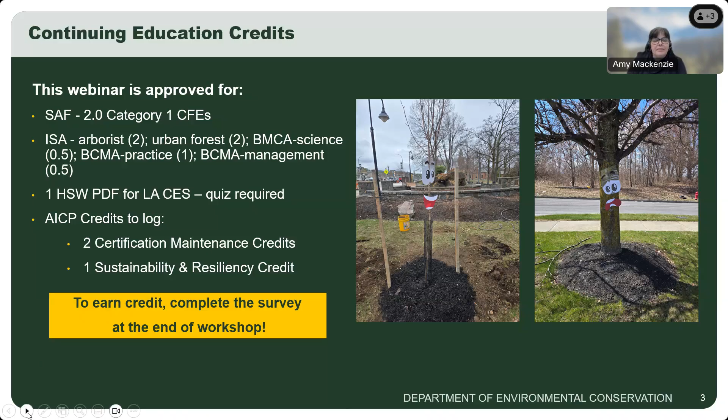You will hear from 3 great speakers today whose presentations will improve your knowledge around what tree roots need from soil and methods you can use to provide those needs. Please enter your questions in the chat as we go along, and we'll save about 10 minutes after each presentation for the presenter to respond.

Our first presenter is Angelo Schembari, who is often asked, 'What's wrong with my tree?' Unfortunately, that question is often asked years after rooting issues could have been prevented. Angelo is an International Society of Arboriculture certified arborist and owns CGL Arborist Services - CGL being his kids' initials - in Cornwall, New York, in the Mid-Hudson Valley. Angelo is also president of the New York State Arborists Association, an association of professional arborists and educators that promotes public interest, fosters research and education in the care and benefits of trees, shrubs, and their environment. So thank you, Angelo, I'll have you put your show up and take it away.

Thank you, Amy. I just want to chime in that if things had gone according to plan, I would no longer be the president of the New York chapter ISA, but our conference and election got snowed out with the major storm we had. So I'm president for another 4 days, theoretically. But thank you for the introduction. Amy and I have known each other for over 15 years now. And although we worked for the same company and worked together and spoke to each other via cell phone and two-way radios numerous times, we met for the first time in a gas station accidentally.

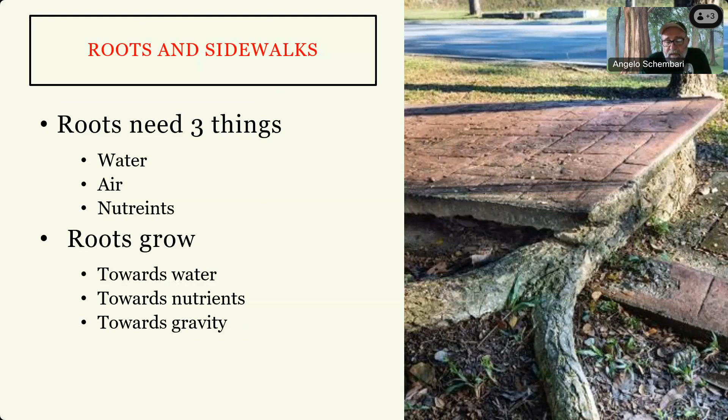Just basic biology: roots need 3 things. They need water, air, and nutrients. Roots grow towards water, they grow towards nutrients, and they grow towards gravity. Those are the 3 tropisms that direct root growth.

The problem is the need to grow towards gravity can be overcome by limitations of water, air, and nutrients. When we have sidewalks, the area immediately under the sidewalk has air and water. It's generally limited in nutrients, but that's enough to overcome the tree's desire to force roots to grow lower.

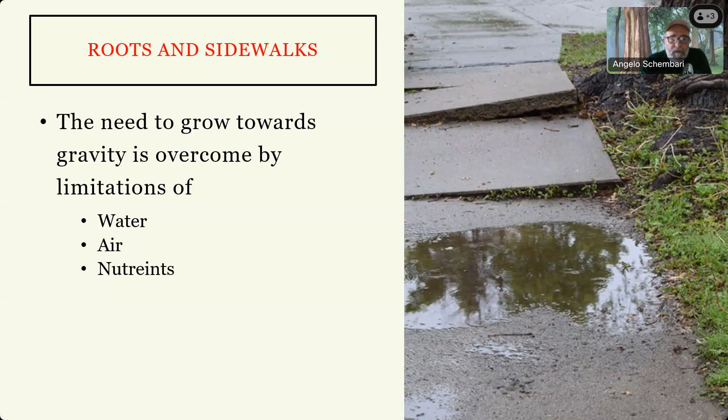So we have soil under a paved surface, whether it's asphalt, concrete, pavers, or pervious pavement. The top surface is typically highly compacted to support what's above it. For drainage reasons, there's a thin layer of gravel, sand, or other hard-to-compact material that maintains drainage and air spaces, and roots tend to grow there because of the availability of air and water. Since that's immediately under the paved surface, the roots tend to disrupt or lift the surface above rather than compact the soil beneath.

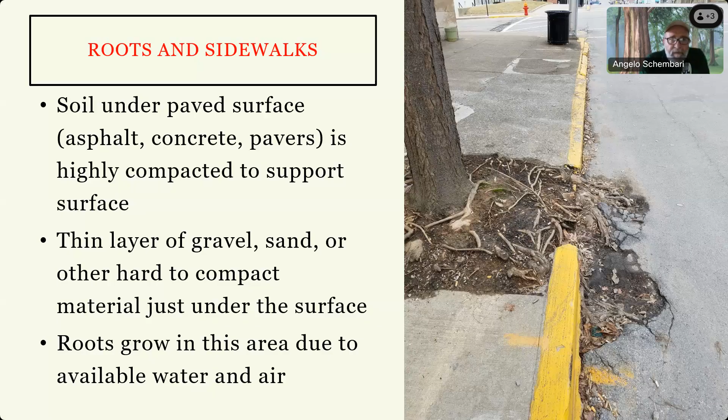People say to me all the time, my roots are growing up through the soil, and I say to them, yes, they are. It's easier for a root to displace a small amount of soil - 1, 2, or 3 inches - above the root than to compact all of the already compacted soil below it. That causes this asymmetrical root growth, and the roots grow upwards through the soil.

In the areas where I work, mostly the Hudson Valley and up into the Catskills and Southern Capital Region, the majority of soils we encounter are heavy clay with a lot of embedded rocks. It's typically compacted, whether in urban or suburban space. Soil compaction before any paved surfaces go in is already a challenge for many trees we commonly plant, and the compaction from installing a sidewalk or driveway just makes the problem even worse.

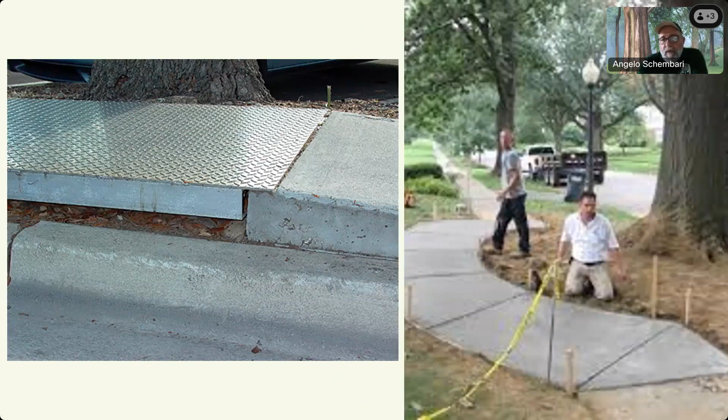In some places where ramping doesn't work, if you look on the right, we reroute a sidewalk around a tree. Lots of times people say, well, that's easy - but depending on who owns the sidewalks in your municipality, that may involve a whole legal process of securing new easements for the sidewalk to extend further into the property than originally laid out. That's an added cost down the road.

Or you could get really creative, like they did on the left here - there's actually a metal bridge over the sidewalk where the roots were.

The better plan, the better process, is to start out with something that has a high probability of success at the designing stage. A lot of urban street tree planning is still done by architects and engineers. Engineers worry about infrastructure, drainage, and trip hazards. Architects worry about making it look nice and presentable, something a community can be proud of. Arborists and urban foresters are often consulted at the last minute, or only when there's a problem.

Somebody told me a long time ago - not to knock on landscape architects - but landscape architects' goal is to make it pretty, and arborists' job is to make it survive.

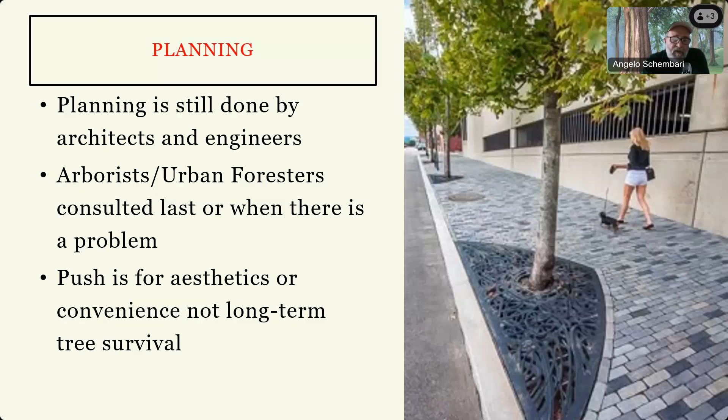The push for aesthetics or convenience does not typically work well for long-term tree survival. So we create a situation where we go out and put these metal grates in because everybody thinks that's going to work, and they've appeared on so many streets. There's a call out on landscape plans that's easy to do, and we put this little tree in this metal grate, in this tiny tree well, with impervious paved surfaces all around it. And 20 years down the road, we end up with the picture on the right.

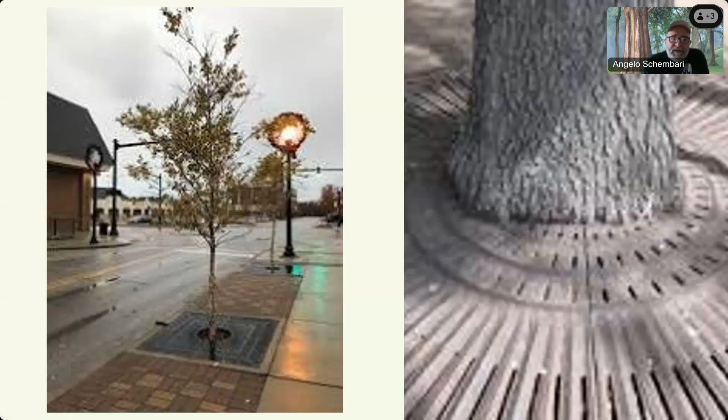If you're familiar with metal tree grates for tree wells, the one on the right is designed to have sections broken out as the tree gets larger. But with many other aspects of municipal tree care, there's just not the time or manpower to get out there and do what everybody knows needs to be done. So the grates aren't broken out, the holes aren't enlarged, and you end up with situations like the grates girdling the trees. So the planning needs to be done from the ground up.

The way we do that is we plan for adequate and appropriate soil in large enough quantity. Structural soils, from the aspect of tree root growth, are not soil—they're stone for the most part. Structural soils serve a very important role when you have, say, a curb lawn with a tree in it, and adjacent to that a sidewalk, and adjacent to the sidewalk a regular residential lawn. Structural soils can be very useful in bridging the gap between the tree and the proper rooting area in the residential lawn.

The problem is structural soils are typically installed somewhere between 6 and 10 inches in depth. To be really effective, they need to be installed to about a 24-inch depth, which very few people are doing.

Not to totally trash structural soils, but if you go back in time, structural soils were all the rage in New York State and many other areas in the Northeast. The structural soil we use is typically CU structural soil, which is Cornell University structural soil. The composition and the rights to sell it are a patented process.

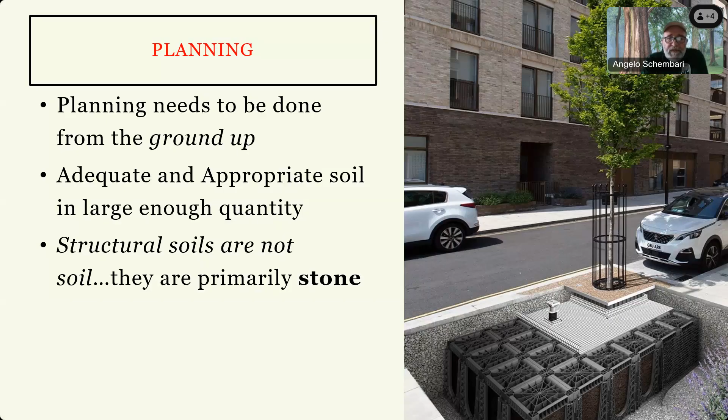So our current tree planting models produce large trees by luck, not by design. The tree in that picture—you can see the sidewalk is lifted to the right of the car there.

But our current models have a lower front load cost. They're cheap to install—you dig a small hole, make a small tree well, put in a small tree, and it's pretty inexpensive for a municipality to do. But they have a much higher backload cost. As the trees get larger, you're looking at milling sidewalks, replacing sidewalks, tree removal and replacement, and potential

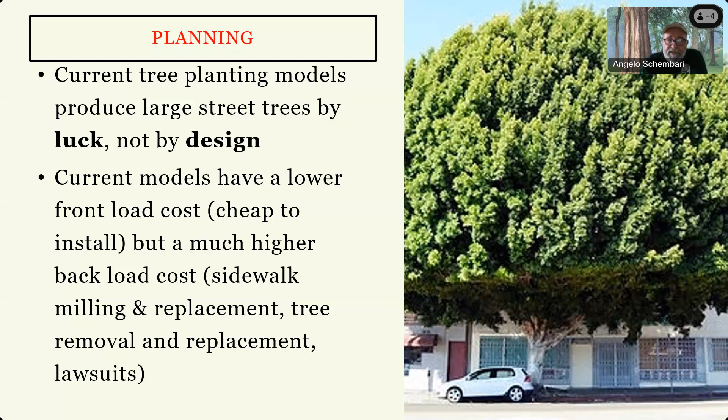lawsuits down the road. The models that use Silva Cells or other subsurface soil rooting mechanisms cost a whole lot more to install up front, but the long-term cost and the ability to consistently provide larger urban canopies, without the continual cycle of plant, maintain, remove, replace, is in the long term a much better value for most communities. The problem is coming up with that upfront cost can be very, very challenging for most communities.

So when you're doing planting, lots of times people don't know where to start. How do I plant? What's the right way to plant? Well, there are guides that exist to help decision makers when it comes to tree planting. The first guide that I typically turn to is a series of standards called the ANSI A300 standards. It covers every aspect of tree care.

They're developed by TCIA, the Tree Care Industry Association, ISA, and input from many other stakeholders in the tree care industry. They're updated very frequently. It was all in one book, then split into each different area having its own book, and now they've put it back into one book. So if you're involved with tree planting and maintenance, having a copy of the A300 on your desk would be a good place to start.

The A300 does not read easily. There are constant should and shall lines in it, and should is a recommendation while shall is kind of a mandate. So to make that a little easier for people to deal with, the best management practices were developed.

Thanks so much, Amy. I'm Brent Knepper, the urban forester for the city of Kingston. My talk today is called Preserving Trees in Sidewalk Design. This is going to be a focus on a case study that we did here in Kingston. Some key points, kind of general purpose.

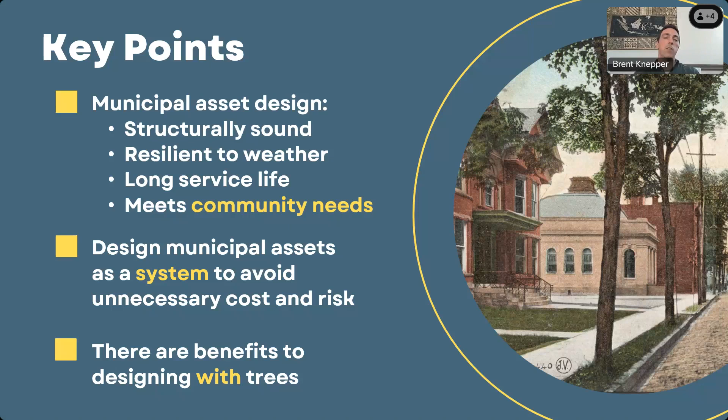It's what we're all talking about today with trees and root space. I'm going to look at it from a municipal asset design level. Any municipal assets, ideally, we want them to be structurally sound, resilient to weather, have a long service life, and meet community needs. Designing those municipal assets as a system is our best way to avoid unnecessary cost and risk. And there are benefits to designing these with trees in mind.

Here in Kingston, we're a small city. We have just over 3,000 street trees and 80 to 90 miles of sidewalk, a lot of which is bluestone. For a community that's only about 8.5 square miles, that works out to about one tree every 150 feet or so, which is also usually our general parcel size too. So a decent density for a small urban environment.

One example of that is an update that we did this past summer on Wall Street in our Uptown neighborhood. This includes a before picture. You can see this is blacktop that was poured over multiple times. There are 4 shade trees in this 100-foot section of blacktop sidewalk that's going to be updated. At the time, there's a lot of pavement cracking and uplift as a result of the root conflicts from compacted soil.

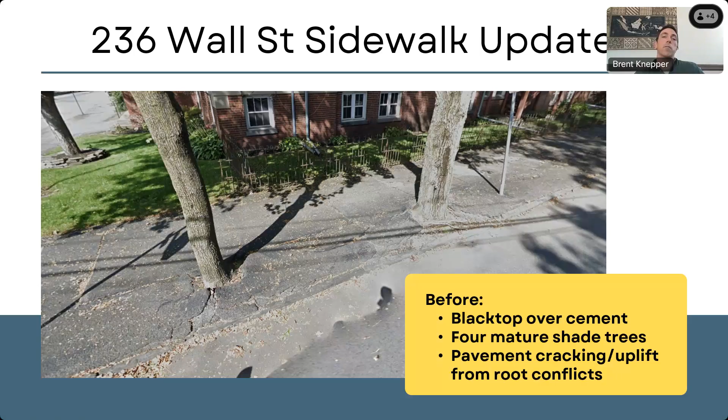The original sidewalk plan, pretty standard for installing new sidewalks: excavating materials, compacting subgrade, base course gravels, and then the hardscape going in on top, in this case bluestone. Although this wasn't called out in any formal plan, it would have involved cutting through about 40% of the existing tree roots as they were conflicting with a new sidewalk being laid flat with no slope changes.

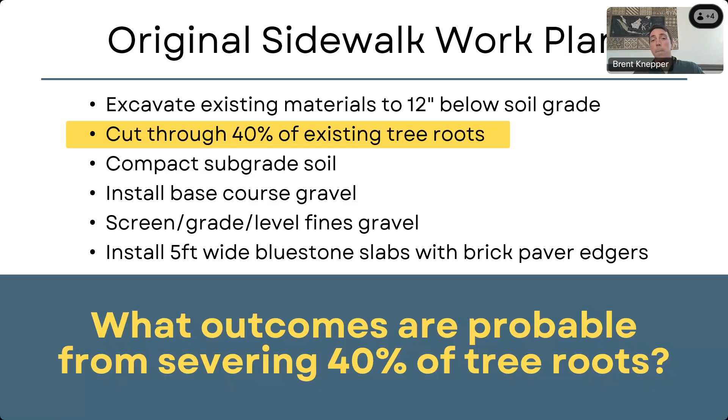So a question worth asking is: what outcomes are probable from severing 40% of tree roots? Best case scenario, in the short term, you'll have dead branches. Where roots are cut, we can usually look up into the canopy as a simplification and find dead branches resulting from those cut roots. The first 5 to 10 years is when you could expect something like that.

In the medium term, 10 to 20 years, the trees might decline. Pests, disease, decay could develop in those trees. The trees will also try to survive, of course—the roots will just regrow under the sidewalk, and as a result, the root and sidewalk conflict cycle restarts. For the most part, these are nuisance and maintenance items to consider. Long term, we'll again have pavement uplift and cracking leading to replacement, which generally leads to a lower service life.

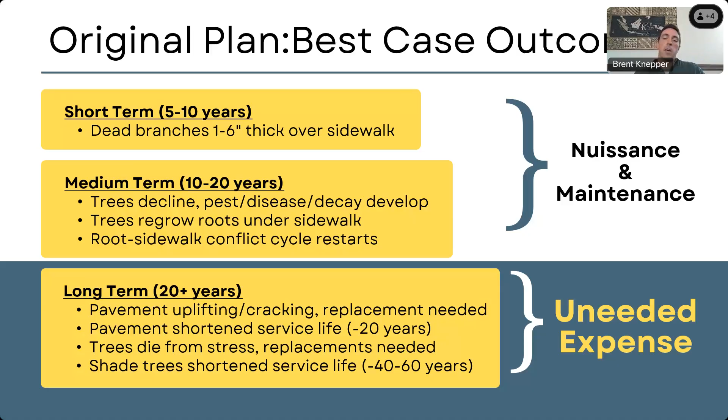Of course, there are worst case outcomes when you do not design to incorporate existing tree roots. This is a little dramatic on my end, but I use it to make the point that when there is no longer the anchor support of tree roots on the sidewalk side—be it from cutting the roots for a sidewalk project, or just further compacting over those roots, which could lead to root decay and decline—the tree is no longer structurally sound. It's a simple formula: the force of wind during storms, multiplying the load at the tree's weight, but without any of the support of the roots on the sidewalk side, has a very probable outcome of whole tree failure.

Personally, I would like to avoid this outcome, and I think most urban and community foresters are quite often thinking about this with their plans.

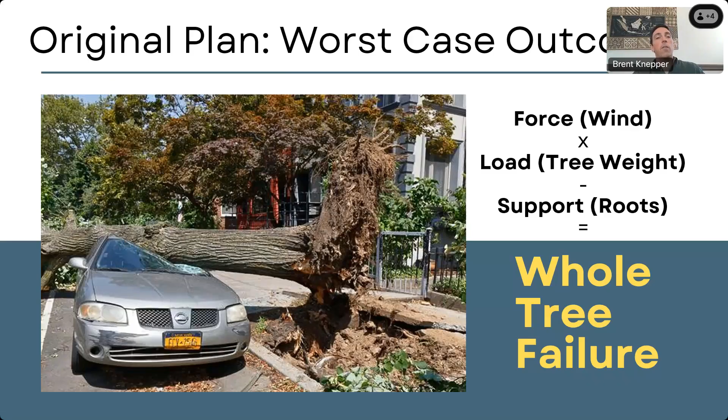So for that reason, we came up with a new sidewalk work plan. The main changes focus on excavating the top 24 inches of existing materials by hand and air excavation. The original blacktop and stuff still had the capacity to be removed with an excavator without causing root damage. This is a retrofit application.

Today we're talking about pros and cons of structural soils. Structural soil, not being like a modular structure that has finite size requirements, means that it can really fill organic shaped voids.

Think about the soils that you might excavate around tree roots when trying to preserve them. Using hand labor or air excavation minimizes damage to the structurally most important roots in the trees. After installation of the structural soil, which was designed to still reach that 95% proctor of compaction that engineers and sidewalk designers think about so much, the top layers, the more aesthetic parts and the hardscape, can still be put on as normal.

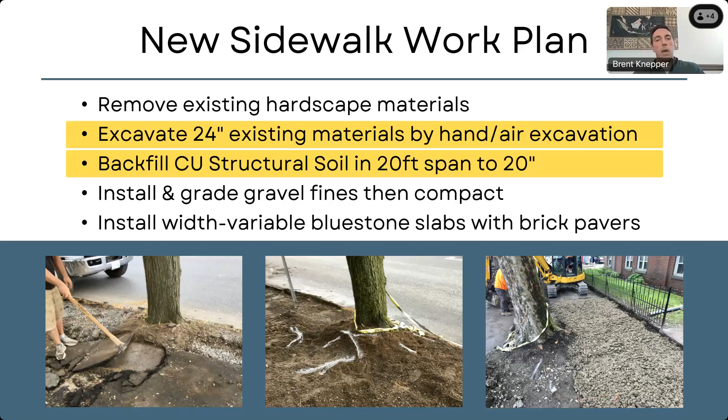Here are some progress photos. On the left, you can see an excavator installing the structural soil from a parked dump truck.

One recommendation with structural soil is that you want to keep it damp. The clay that's acting as the binder for the other materials and the large supporting stone, they really want you to keep that damp. Luckily, although the time of year we were doing this was pretty hot, we had high humidity levels and a lot of rain going on too.

Using the excavator, the tracks actually create lower PSI pressure on the soils compared to tires, and in some cases even less pressure than human feet. So it's a way of using machinery where we're not struggling with additional compaction, which is what we're trying to alleviate with this retrofit design.

On the right, we see further along in this progress, the new materials. This is a bluestone sidewalk with brick paver edging that's been installed. The workers are now bringing in topsoil, and then we'll have seed and straw put in place to keep a planting strip on the side of it.

Take a look at the one worker who is walking towards the far end of the frame, not holding the wheelbarrow. He's standing over a section of sidewalk that is now all brick pavers. This is ADA approved, and by having the brick pavers put over structural soil, there is an increase in air and water percolation to below, for those who were listening during Angelo's talk about what tree roots need.

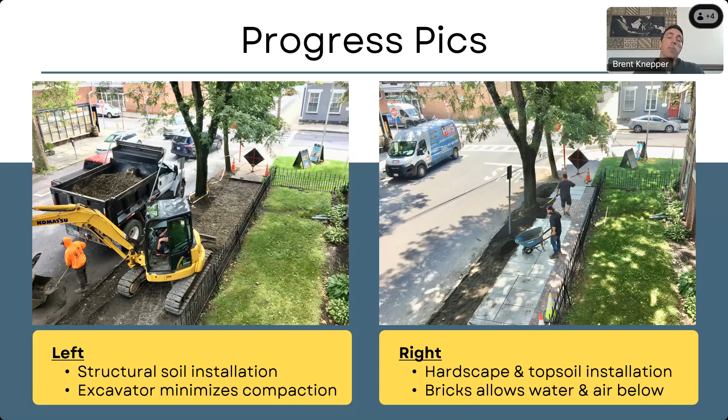Some more details of this completed work. On the left, you can see that there was a total reduction in the width of the sidewalk around these trees. This allows for that tree root flare that all us arborists love so much to continue to grow.

The sidewalk is doing an up and over approach around the tree roots. Some were at a high enough surface level. I regret that I didn't have a good photo of that air excavation where you only see the roots and all the soil has been removed above and below, but timing didn't really allow for it.

In this case, the slope that's going over these most surface level tree roots ended up at about 2 degrees, still within ADA standards for going up and over. Visually, for most people using the sidewalks, or those who might have concerns about sidewalks and ADA compatibility, the slope is very hard to notice. It may also just be something that we see in any community with any kind of rolling terrain, just a generalized slope.

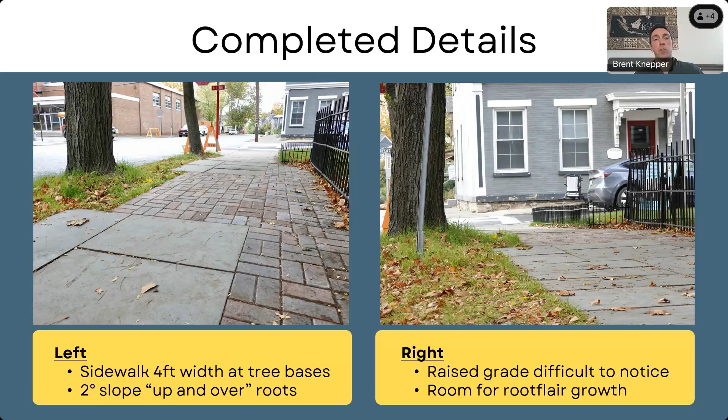To talk a little more about the ADA aspects, these are really great numbers to know and metrics to use when thinking about keeping trees in a sidewalk reconstruction process. The top one, I was just touching on that.

The ADA allows for a max slope of 5%, or 1 in 20, for doing that up and over kind of work. There are allowances for narrowing sidewalks. I think that's really important in our Northeast urban communities where we don't have a ton of space building edge to building edge, compared to how some newer developed communities might have.

So to that end, sidewalks under ADA Chapter 4 walking surfaces can, for a very short distance, go down to 32 inches wide and still be ADA compliant. They can't do this for more than a 24-inch distance. I think that's very important to note. So only for 2 feet can it go down that wide. We think about the size of most street trees.

I think that gives us some breathing room to work with, because as we get to the third point, after that 32-inch wide reduction, the ADA would want at a minimum to go back to 36 inches wide for a minimum of 48 inches distance. In general, ADA Chapter 4 says that when a sidewalk is less than 5 feet wide, for every 200 feet a passing area must be included. That passing area gets defined in a few different ways under ADA. If that's something you want to focus on, look at Chapter 4 walking surfaces, specifically part 403.3 and 403.5.

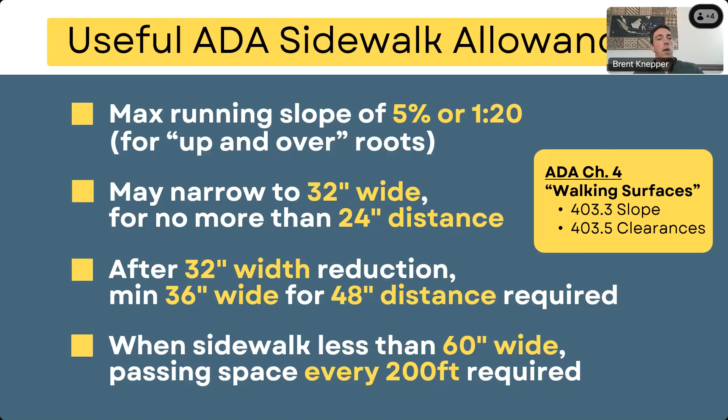Let's talk about the financial considerations for these projects. I think this is useful information for everyone listening. Bluestone restoration sidewalks in a historic area are not cheap to do, of course—unfortunately no sidewalks are cheap these days. The original project would have worked out to around $80,000. For a relatively small portion of deviations from the original plan to include the structural soil, the process does reduce the amount of total ROB base aggregate gravel that would have been used otherwise. So there's a little makeup with that, but structural soil will be more expensive than plain gravel, specifically the CU trademarked structural soil blends.

There's an increased time aspect with doing this project, as you can expect with hand excavation around the tree roots. I gave the contractor a lot of information on air excavation and how to do that, but it was a little over their threshold for what they were willing to consider at that time. So they had the manpower and focused on hand excavation instead, and I had to be on site to make sure everything was going well. It worked out well, and I was happy that by engaging with the contractor in a kind, understanding, problem-solving way, they wanted to work with me too. That led to about a $10,000 increase in price for the project.

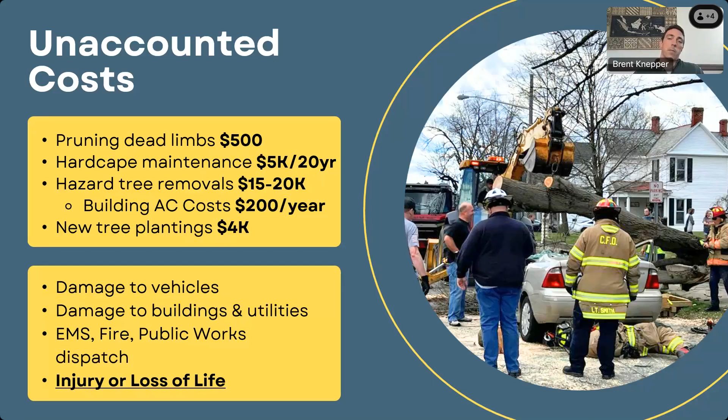Some additional considerations outside of just financial costs, because I think a lot of us are thinking about street trees beyond just financial costs. The average life of a forest tree, from the source I provided, is about 160 years for most of our canopy species in the northeastern forest, whereas the average life of a street tree is 23 years. That's not evenly distributed, so I give a note to what that might look like, because often there are different numbers thrown around for how frequently street trees die.

A lot of them do die in the first 7 years—30% is a reasonable number. In the first 15 years, another third, and by 25 years, another third. All of this is generally because of additional stressors urban trees face: limited access to air, water, and nutrients, pollution, damage, and heat stress. These are all factors.

When we think about trees like the ones in the case study I'm sharing today that have made it past that 25-year mark, they're already just the only 10% that have survived after all these attempts at planting trees. It's important to think about the fact that for a street tree to reach carbon neutrality, factoring in the cost of growing the tree, the nursery, the materials for transporting it, the fuels, and so on, a street tree doesn't really reach carbon neutrality until somewhere between 26 to 33 years. So we may be dooming the few trees which do survive if we're not designing for things like root space in our municipal structure designs.

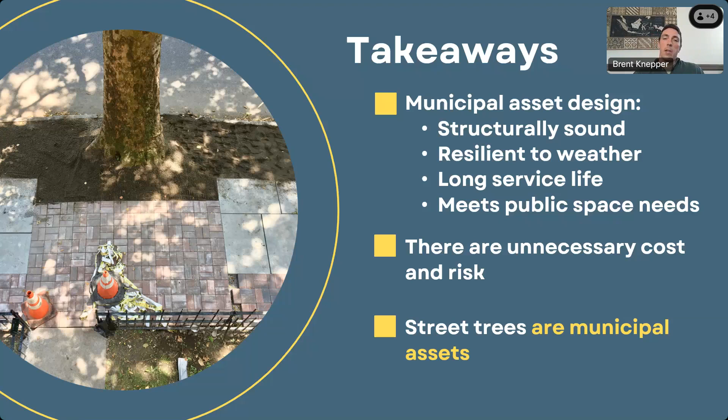And with that, I want to say thank you to everyone. Happy planting and happy designing. Looks like I ended up going a little bit faster than I thought, but hopefully there are some questions people have.

Amy, we lost your audio a bit. I figured out the problem. Can you hear me now? Amy, I can hear you now. Okay, well, thank you for that. It's such a forward-thinking and practical solution. I hope everybody takes a lesson from it.

We have about 10 minutes for questions, and it looks like we have one from Ben Mertz. Do you expect additional maintenance costs because of the pavers over concrete?

I'll give you two answers to that, Ben. Short answer, yes, I do expect additional costs in the situation that the 24 inches of structural soil provided is not enough. I think 24 inches, as Angela mentioned, is kind of the minimum, but the comparative cost of not doing it, I think, is higher. So that's kind of the one double-edged sword to this. I don't think anything really has a zero maintenance cost to it, but yes, it's important to think about in these retrofit applications what maintenance costs might come down the road. Those brick pavers may have a shorter service life compared to the bluestone, but they're spec'd at a width that would then allow for a bluestone slab to go over the top as well.

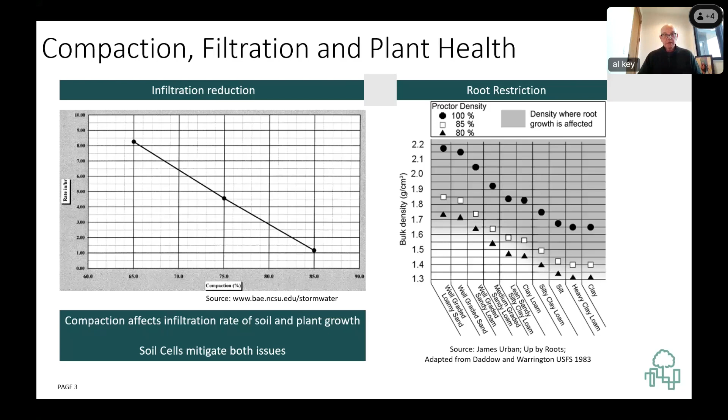Likewise, as compaction increases, infiltration decreases. So essentially, we are building, or have traditionally built, effective drainage channels for dead trees.

Water is a resource. Keeping it on site is something that we would really like to do. It is often mandated by the DEC in the state. And I would say, where there's a lot of talk about budgets, if we can raid the stormwater budgets, we can help pay for these more expensive systems like mine, like the Silva Cells, these suspended pavement systems.

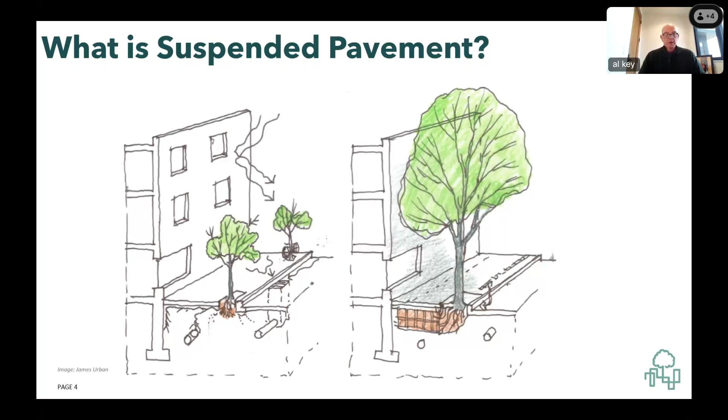So some sort of box that you put underneath the sidewalk to support the sidewalk is what I'm proposing for people to do. I don't want to spend a lot of time selling you guys my products. I'm concerned about your impartiality. For Brent and for Angelo, there are a number of manufacturers, I'll be going into those, but I assure you that we have fully thought this out.

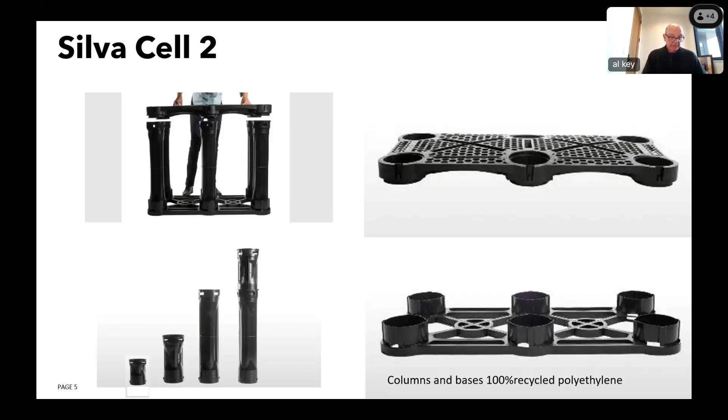And Jim Urban, who Angelo spoke about briefly, was instrumental in the development of this product class. To just show you what we've done in New York, I'd like to show a few projects of what we've done, and then we'll get into the course proper.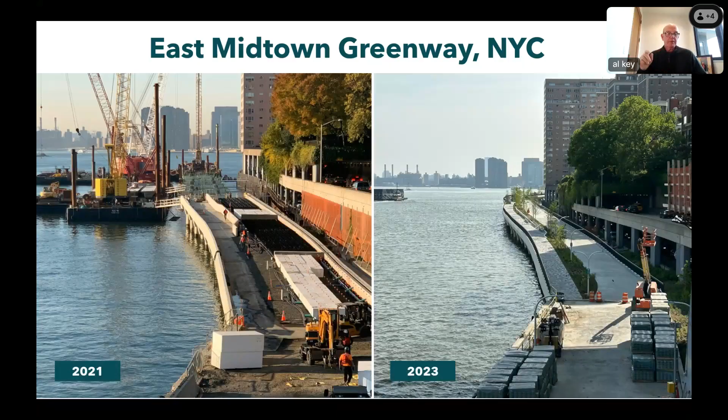East Midtown Greenway is our most recent large project in New York City. This is a bridge from 54th Street up to 59th Street, which is meant to be part of the bikeway all around the island of Manhattan. These are the silva cells being installed, and then I was there last summer, took a picture of virtually the same place.

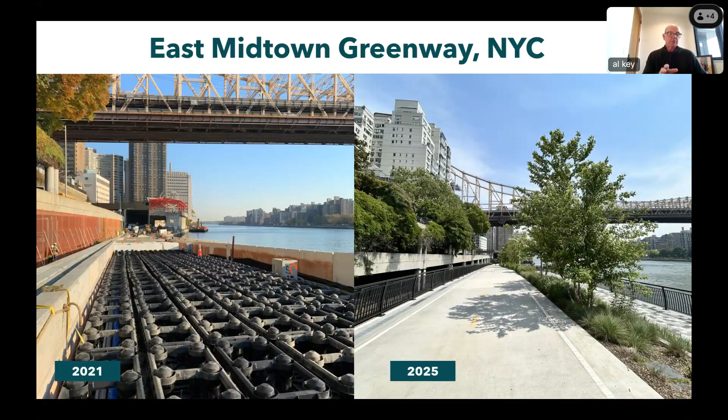Likewise, New York City DOT and their Plaza program, we have about 3 of these in the ground. It's amazing what happens when you grow trees in a loamy soil. It really, this is really good stuff.

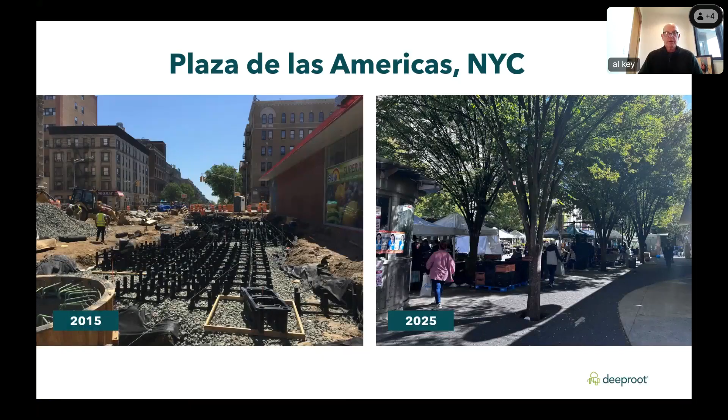Our largest installation in New York City is Hunters Point. This is 21 block faces of silva cells. They're in 2 different phases, the grayed off portion on the left and the colored portion on the right.

This remains a prime example of using trees for stormwater purposes. The stormwater budgets are the largest budgets of all, water budgets in cities are the largest budgets of all, much larger than police, fire, parks, any of that sort of stuff. This is just a really great example of a permitted stormwater project that we have in the state.

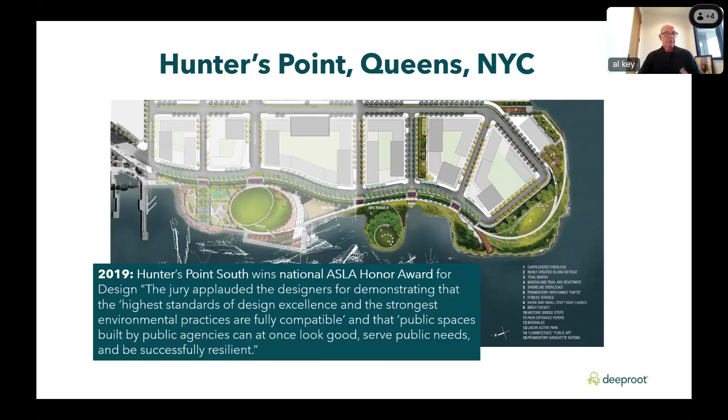The way it works is pretty simple. There are silva cells underneath the porous paving on the right-hand tree there. The sheet flow goes across the sidewalk into the porous paving, and then exits out through the silva cells, slower, cleaner, cooler, and less. It's basically a sand filter to do these things, and the good news is the trees get big.

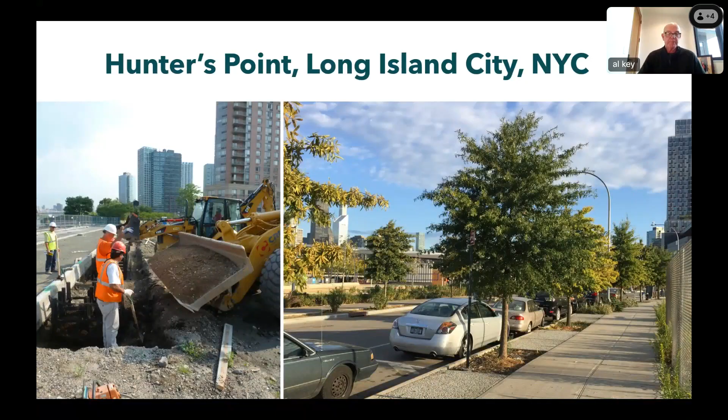The most interesting project we have in New York City is the Metropolitan Museum of Art. This is on the blocks between 79th Street and 83rd Street. The 4 blocks there are all done with approximately 100 trees and 90,000 cubic feet of soil.

What's really interesting about this is that just underneath the plaza are the 2 potable water delivery mains for all of Manhattan. You can see in the photograph that the silva cells are more shallow on the left and then go down deeper on the right, just avoiding those 2 water mains. This decision to put trees on the plaza was made at the highest levels of city government, because there were discussions, shall we say, between DEP, who did not want any trees near their water mains, and the people in parks and in the museum itself.

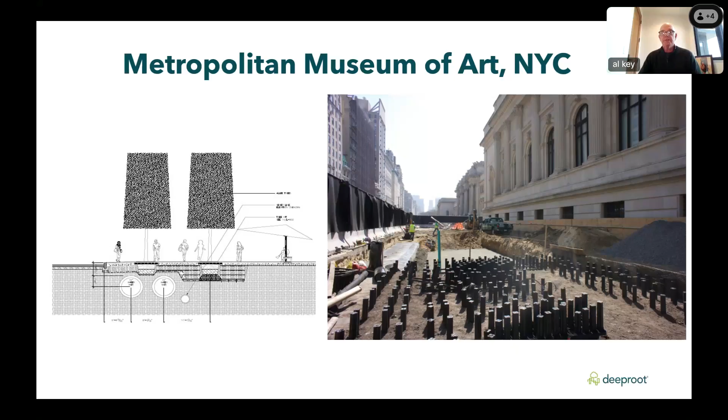So anyway, Mike Bloomberg got involved with this one. This dates from 2013, the installation. There are four areas of trees - actually 4 bosques, 2 to each side of the famous stairs, and there are 2 alleys of lindens.

This is another stormwater project in that from the left-hand side of the trees, the water goes from the center of the trees over into the curb and gutter, just as it would normally if this was completely paved over. But from the right of the left-hand tree over to the channel drain on the lower right-hand side, all the water sheet flows into that channel drain and then goes into the cells themselves, as does the water from the building face into that same channel drain as well.

I would say that in all cases, when you use this porous paving or somehow get water into these trees in these systems, that is a preferred method of doing it. Trees need water as well as uncompacted soil to survive. So those are our big hits in Manhattan.

We have about 75 projects throughout the state, and this is sort of the beginning of the course that I'm going through here. We're going to talk about 3 different ways to do this sort of stuff. There are custom systems, there are soil cells, and then there are structural soils. For custom systems, there are various different ways to install those or to build those. I'll give you a few examples.

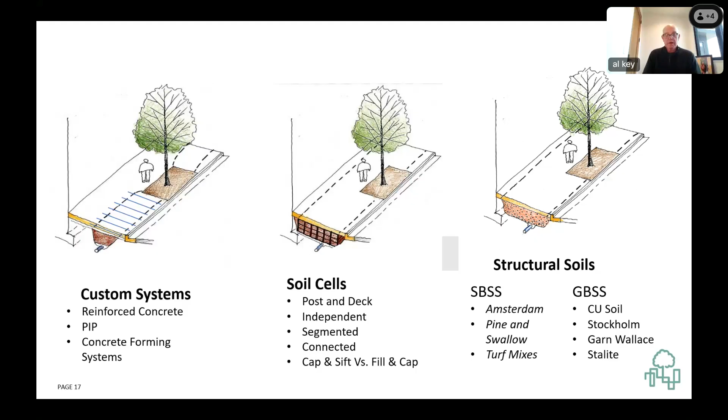I mentioned soil, and I would say that one of the biggest problems we have is the soil industry screens all their soils. Soil is a bit like food in that the less processed it is, the better. So we're big believers in unscreened soil. Work by Barrett Kays and Susan Day is clear that unscreened soils, unprocessed soils, far outperform screened soils. Screened soils were developed in the turf industry for golf courses and playing fields and that sort of stuff. What is great for grass is not necessarily great for trees.

In all cases, street trees like unscreened, healthy, untampered with soil. The less processing, the better.

Just to show you an example, the Martin Luther King Memorial in DC, just off the mall. In 2010, when I took this shot of the soil in the silva cells, oh my God, I thought it was terrible. How could this soil isn't very dark? There are all these clods and peds, and there's no measured sand content in this thing. And my mentor, Jim Urban, was thrilled with it. I didn't really understand this until later on. I went to the site and I saw the American elms performing like that.

So yeah, please, less processing the better with all the soils, and unprocessed soils outperform processed soils in all cases for trees.

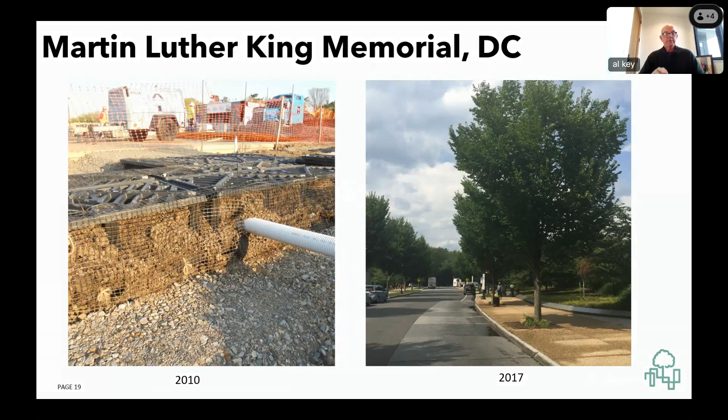So with that, I think I'd like to talk a little bit about the custom systems that are installed already, and how that happens.

I didn't know about it until Mark Johnson, who is at the University of Ulster, wrote his book, Street Trees in Britain, A History. If you want to know more about this particular installation, I would call Mark Johnson or get the book. I have a copy of it, and it's very tantalizing the way it's all written.

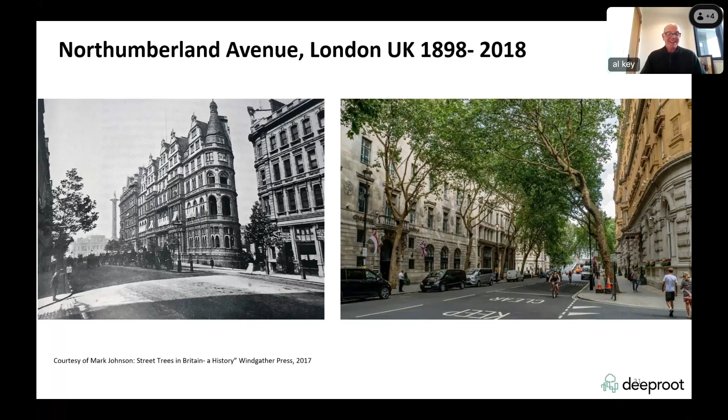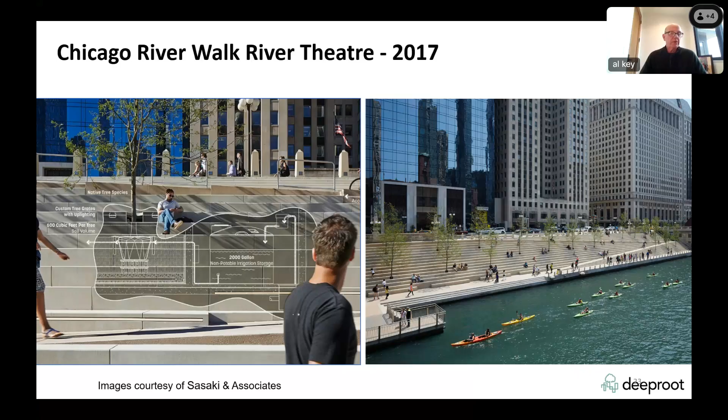So that kind of covers these custom systems that you can do. Those tend to be the most expensive way of combating compaction in our urban environments.

So we've talked a lot about structural soil today, and I would like to say that I am not a fan of structural soil. I love Nina Bassuk and Jason Grabosky. I've known them for 30 odd years. Nina's now retired.

And this is only a minor part of the wonderful work that they've done up at Cornell. I don't want to throw them under the bus, but I do think that there is a better way of doing CU soil with my products. I think it's, well, anyway, I'll get into that later.

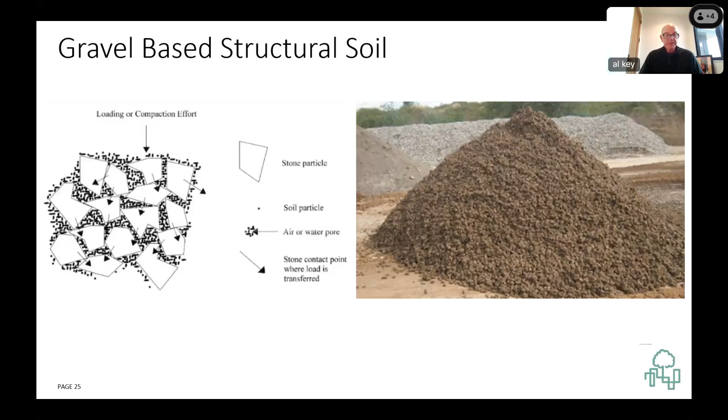The general idea is that there's a skeletal soil that has particles, and the load is transferred through those particles into the subbase, so you can drive a tractor trailer over this stuff, and yet you're going to have uncompacted soil between the particles. This has been carefully studied in Brooklyn, and this particular site has been studied for 30 years.

The general idea is that on the left-hand side you have willow oaks and Quercus palustris, pin oaks, and on the right-hand side in the CU soil. Those on the left are all on open planters. On the right-hand side, they are in CU soil, and it looks similar from side to side, and they are similar from side to side, and you get the idea.

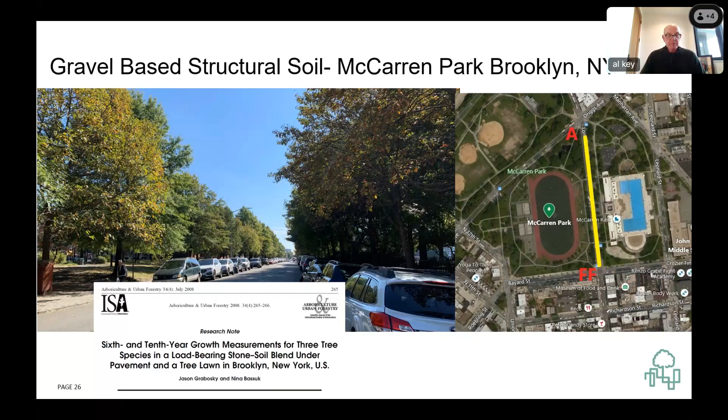However, there is a flaw with this, in that a third of the planters are open to the adjacent McCarren Park. So when you walk down this site, literally there are 30 trees here. About half of those are lifting the pavement, and about half of those again are breaking the fence between where the trees are and the open planters.

So I really like this design. I think the CU soil in this case helped the trees in establishment, but not longevity. The main problem with CU soil, from my perspective, is that it's only 20% usable soil, whereas a product like mine or a soil cell will be 95% soil.

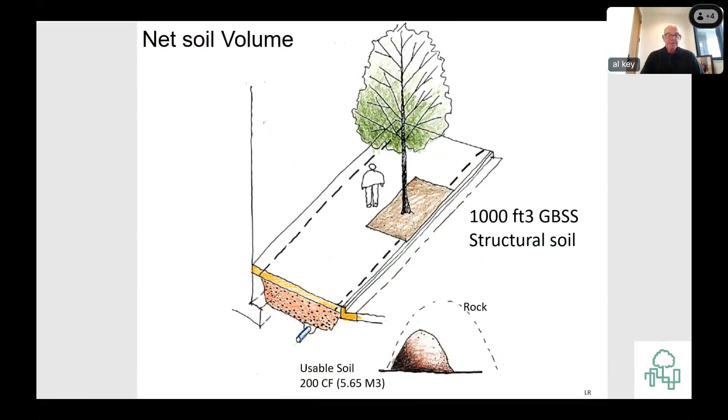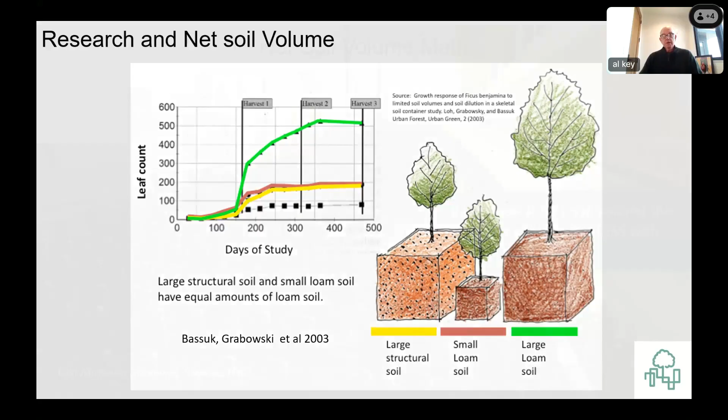So if you look at net soil volume, the price per cubic foot is less in soil cell systems. So if you had 1,000 cubic feet of CU soil, you'd only get 200 cubic feet of soil, and 200 cubic feet of silva cell or soil cells would be half the price, right?

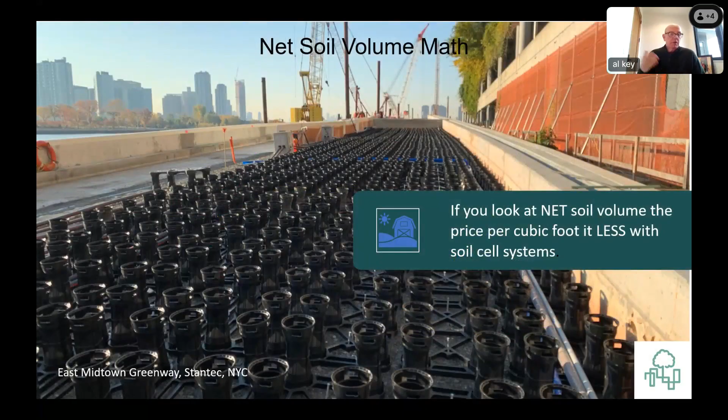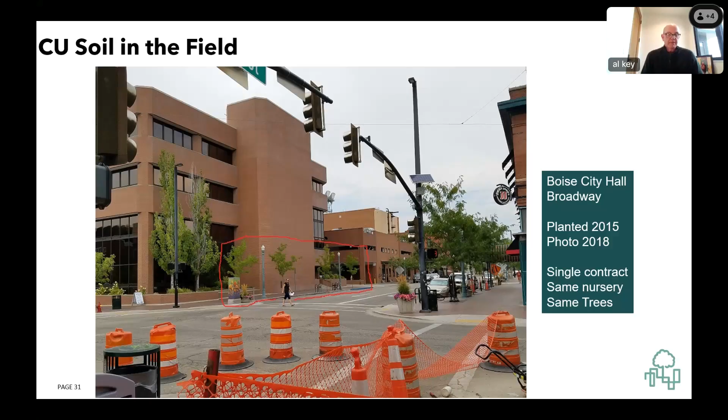So what about in the field? I would say that we collect these things. This happens to be in Boise, Idaho, all across the nation. This was conceived as an us and them test by the city arborist. Trees on the left there, or in the little red box, are in CU soil, and the trees on the right are in silva cells. This was a single contract, same nursery, same trees. Therein lies the difference in performance.

And in St. Paul, same contractors, same nursery, different trees. The trees over on the left side are in silva cells. The trees in the middle are in open planters, and the CU soil trees are over here on the right, exhibiting early fall color.

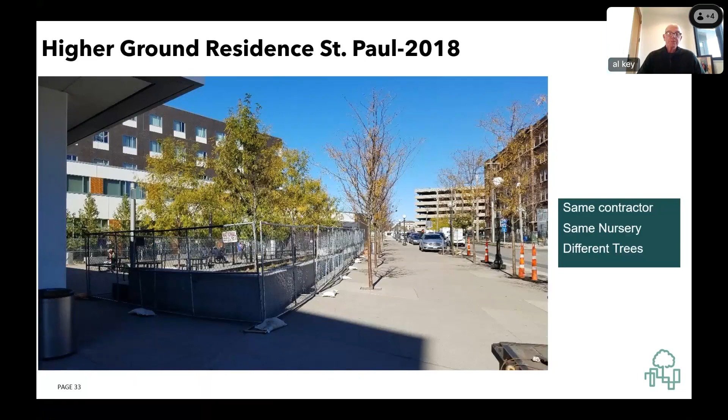So I think it's important to remember that the area of the soil will match the area of the canopy. The ratio of the canopy to the soil is 1:1. But if you're using CU soil, the ratio of area to canopy is 5:1. So you need 5 times the amount of soil to get the same amount of soil that you would with silva cells or soil cells. And I would like to say that because the cost of silva cells on a net volume basis is much less than CU soil, then I would say that it would be a waste of taxpayer money to install CU soil for new tree planting.

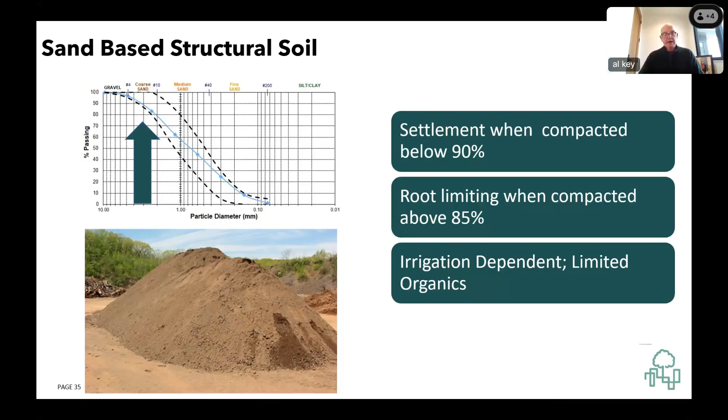There, I said it. The next one is sand-based structural soil. Sand-based structural soil has wide use primarily in New England, and there are a few in New York. I'll show you pictures. This has a dichotomy about it which is unacceptable to the urban forestry industry: it settles when it's below 90% compaction - think broken sidewalks, that kind of stuff - and it's root limiting when compacted above 85%. And it's got to be irrigated. Also, the soil has limited organics, maybe 1.5 organic matter at the most, achieved through compost.

This was developed by Els Kronenbourg in Amsterdam, where they have sand everywhere. This is irrigation dependent, and it works in Amsterdam. And the reason why is they have an uncompacted downtown, along the various canals and things like that. They don't have a 95% compaction standard there, and it looks good because this 17th century city, the cobblestones move and there's no big deal.

Likewise, the water level is discrete. It is controlled by dike. So freshwater lens forms over the salt water, and the trees don't need irrigation because of this freshwater lens that forms over the salt water.

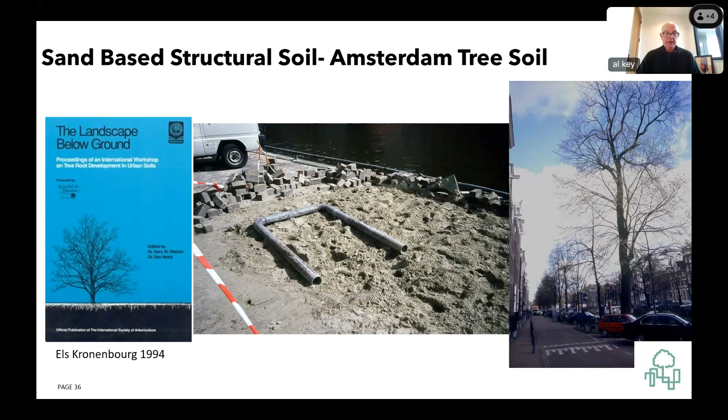Really cool. Talk to Els Kronenbourg about it. She's a lovely lady. She's actually in England now.

The largest use of a sand-based structural soil is at the World Trade Center in New York City, the site of the 9/11 memorial. These are Quercus bicolor, and the trees look really great. The reason why, here they are irrigated, but it is 95% compacted soil.

So why on earth do the trees look so good if I'm trying to throw sand-based structural soil under the bus? The truth here is this is unparalleled nursery practice. Each one of these trees came in on an individual tractor trailer, and those root balls are 10 feet by 10 feet by 6 feet deep. That means each one of those trees has 600 cubic feet of soil just in its root ball. Again, unparalleled nursery practice.

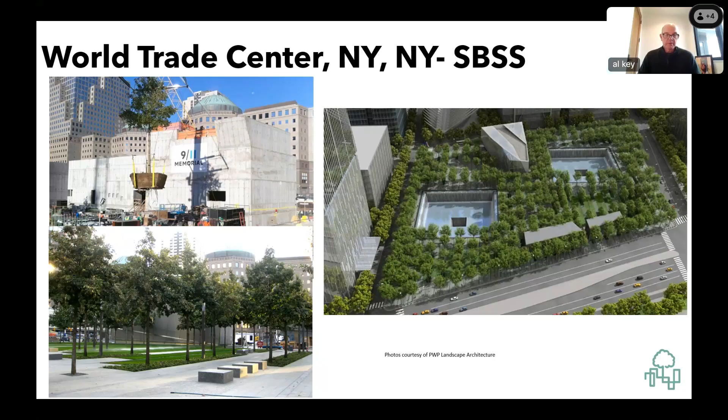This, in my humble opinion, the sand-based structural soil has little to do with the performance of the trees in that regard.

Okay, so those are the two main types of structural soils. There are other kinds too - there's Stockholm-based structural soil, which is similar to Cornell University soil. I hope I made it clear that neither of these things beats out soil cells.

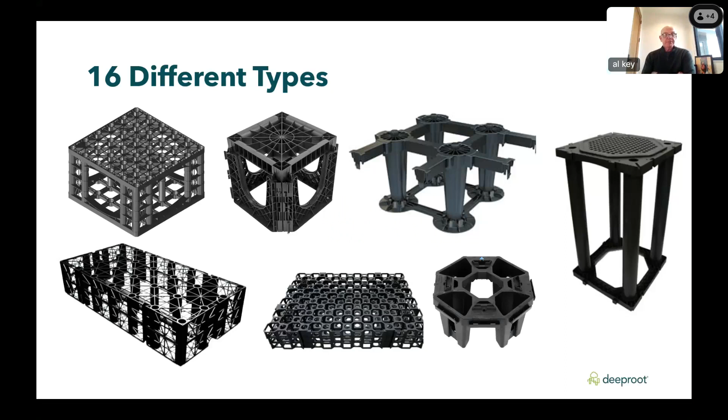I would like to say that this is my least favorite topic to talk about. I get really emotional about all this sort of stuff, so my apologies. But I will say it is a very confusing market out there. There are 16 different types of soil cells, and there's a lot of hooey and misinformation going around the industry as well. I can assure you that mine is the best.

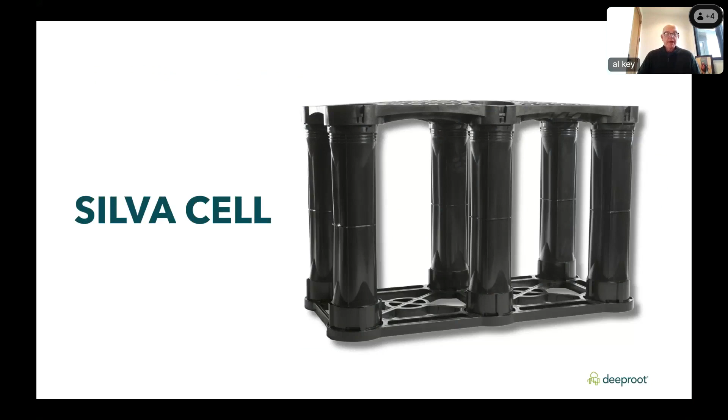In fact, it is the largest of all these ones, because we've always wanted to have free movement of roots and free movement of water within the cells. But because it's the largest unit on the market, our PSI is lower. It's almost like a bunch of dumb jocks in a gym comparing, well, my PSI is bigger than your PSI.

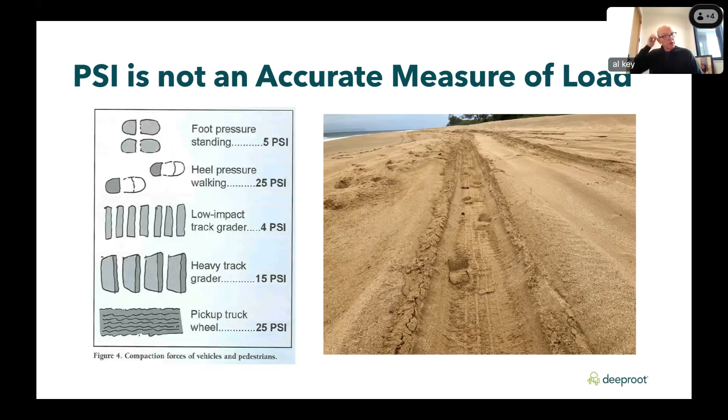PSI is not an accurate measure of load. You'll see that just heel pressure from walking has a higher PSI than a low impact track grader that Brett was talking about - I love that slide of yours, Brett, by the way. The load is prescribed by AASHTO, the American Association of State Highway Transportation Officials, and this is the heaviest thing on the U.S. highway.

All of these manufacturers, regardless of type, design their specifications to this particular standard. But the less expensive ones, the ones that have less plastic and less testing, require different amounts of concrete and aggregate in the paving buildup over the top.

So these are the Silva-Cell numbers. The most common application we have with Silva-Cells is 4 inches of concrete and 4 inches of aggregate. This beats AASHTO H20 with a safety factor of nearly 2. PSI is not even on this thing - it's irrelevant.

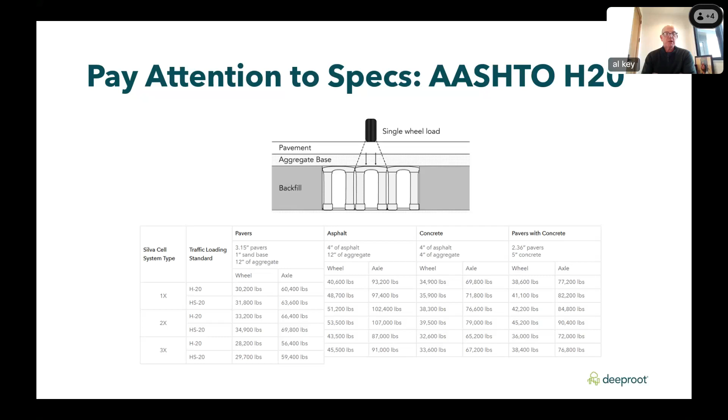One thing I can assure you about Silva-Cells: we have tested every single one of our models by crushing it in an independent lab. That is not the case with many manufacturers - they've tested one thing, they've tested another thing, and they have different models. Make sure that you confirm the testing.

Why is that important? Because these things are traffic rated, not rated for heavier loads like cranes. If you need to put an extendable boom on top of these things, we can make that calculation for you, and our competitors can't.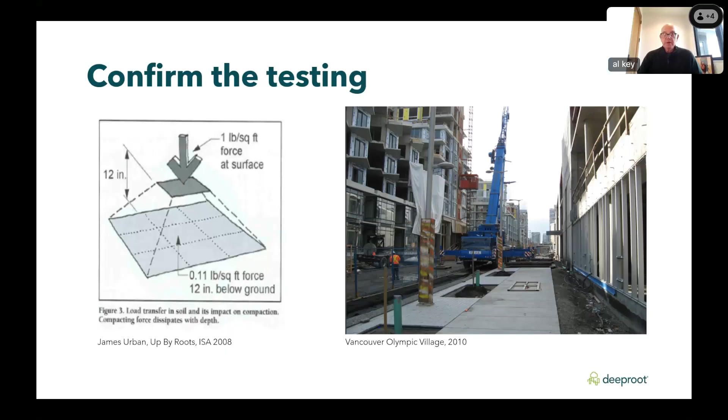There is a real problem with rutting and pavement wear down. Given that we have prescribed amounts of aggregate buildup over the cells, if you can get a civil engineer to say that pavement's never going to degrade, then we can put them in travel lanes. Unfortunately, you're not going to get a civil engineer to say that. That's the reason why we put them off to the side in pedestrian places, parking spaces, plaza areas. There's plenty of room in these streetscapes to put lots of soil cells in there.

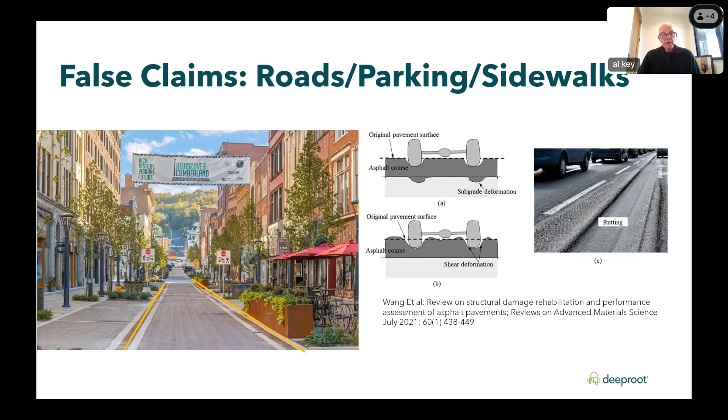Likewise, there's some red herrings out in the industry in that they say, oh well, what about lateral loads? Well, lateral loads are like you've seen pavement moving, that kind of stuff. But it takes a lot of pressure and a lot of force in order to...

So what I'm saying here is the traffic lateral loads are very light, and it's not a concern in these systems. Lateral loads, the heaviest lateral loads are hydrostatic loads. So if you have a retaining wall and water falls behind it and freezes, that's an issue. If you have one of these systems, just make sure that it drains, and all of our systems drain. That's the nature of soil cells in general - they all drain and they all percolate water.

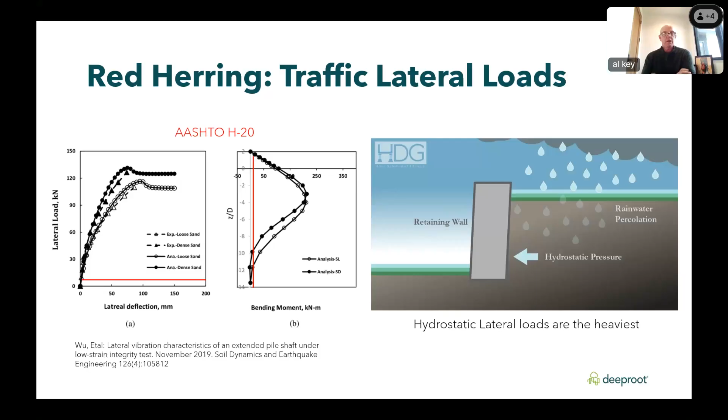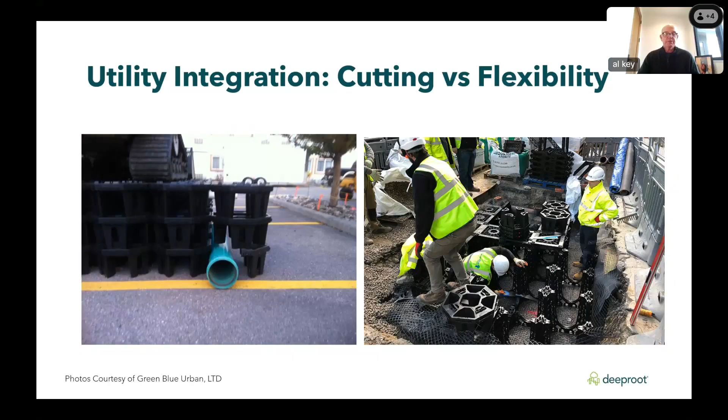We live in the urban environment, and some of the manufacturers say, oh yeah, you can cut our material. There is no testing for this - it voids the warranty. I would never say let's accommodate this utility by just cutting it. That's the reason why our Silva Cell is completely independent from the others, so you can snake utilities through it. You can put the bases down, run your utilities through, and then fill it up with soil if you like. I have a whole presentation, 100 slides showing various different utility things, whether it's light pole footings, kiosk footings, fire hydrants. These things are all well thought out.

How do you repair them? Like a person like Brett, I'm sure would be very interested in how do I get to the utilities, and we even talked about that a little bit. Rest assured, we can address those concerns. We live in the public right-of-way, which is a shared resource with sewer, electric, fiber optic, gas, et cetera.

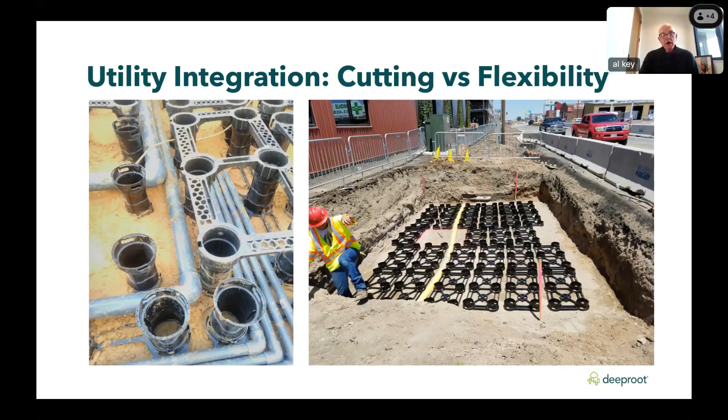That's a long process. We generally like to build our systems dry. Introducing water into a construction site can be problematic and increase costs. That's the reason why we designed the Silva Cell to be a fill and cap system, because this also destroys the soil structure. So I would suggest that if you're looking at soil cell systems, look at one which is not a cap and sift type system.

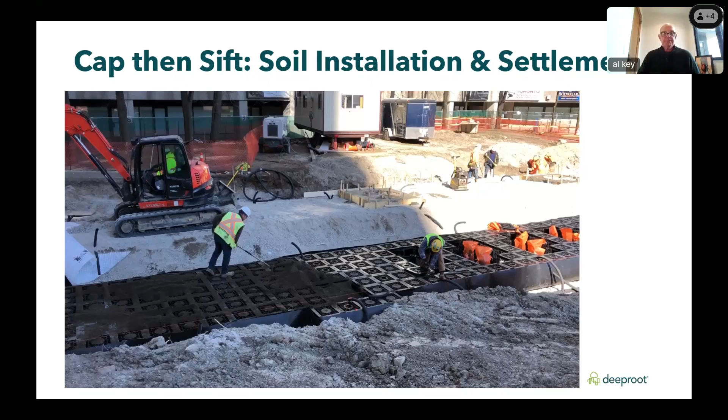And then to sort of finish it up, I'd like to talk about the research that Bartlett Tree has done in North Carolina. This was put together by Tom Smiley, a great researcher. Right now he's doing work on how tree opening size affects tree response, that sort of stuff. But in this particular case, and this is a while ago now - I can't believe it's almost 10 years, or 9 years since they pulled these things out.

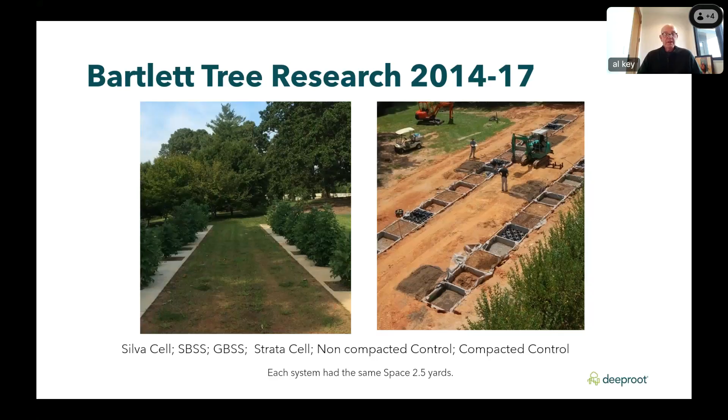They looked at Silva Cells, sand-based structural soil, gravel-based structural soil, Strata Cell, and then they also had a non-compacted control, a tree in an open planter, and a compacted control, compacted up to 95% with concrete over it. In this study, there were two different types of statistical corollaries.

Load-bearing modules with loam is best, period. In terms of tree height and tree diameter, there was no question that load-bearing modules with loam worked out really well, better in all cases than the other options. And they were roughly equivalent to the uncompacted control.

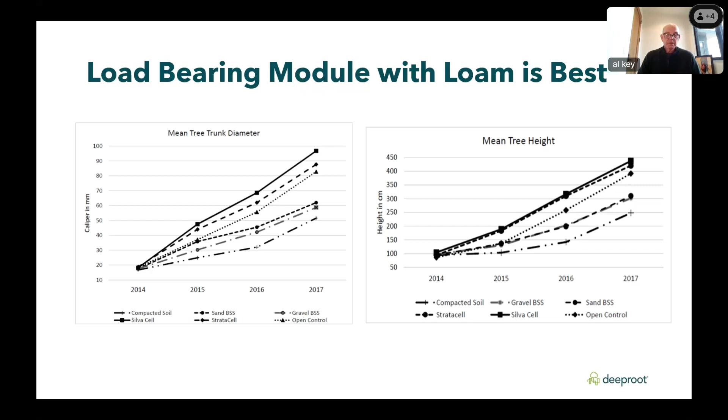And in these structural soil cases, some structural soils did not outperform the compacted control. We'll get into that a little bit. So basically, the load-bearing module with loam is the best way to go.

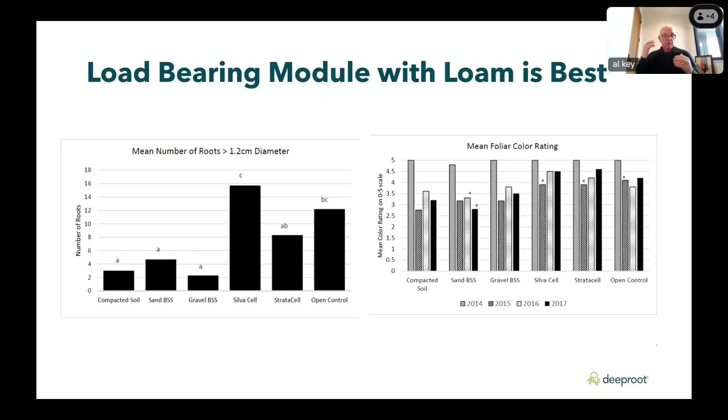Just to show you some different metrics that Tom did - number of roots, the foliar ratings, they're all different. Loam outperformed the structural soil and the compacting controls in all cases. A picture, however, is worth 1,000 words.

So here we have the two controls on the right and the four treatments on the left. The non-compacted control, that's the open planter one, looks pretty good, right? And if you look at Silva Cells and Stratocells, they are roughly equivalent.

Whereas if you looked at the 95% compacted control, it's just about as good as the gravel-based structural soil, or CU soil in this case. Those look very similar as well.

However, the sand-based structural soil did not outperform the compacted control. So this is when I say sand-based, gravel-based structurals, or any kind of structural soil, is not worth the money of installation.

This is the data that I'm using to bring that home. I think the way Brett was using it is an excellent way to use it - in places you can't put a cell in. I think that's an excellent way to do that.

We have used gravel-based structural soil, CU soil, in our installations as well, as a sub-base, for filling corners that we can't get into. CU structural soil is the most carefully researched structural soil out there.

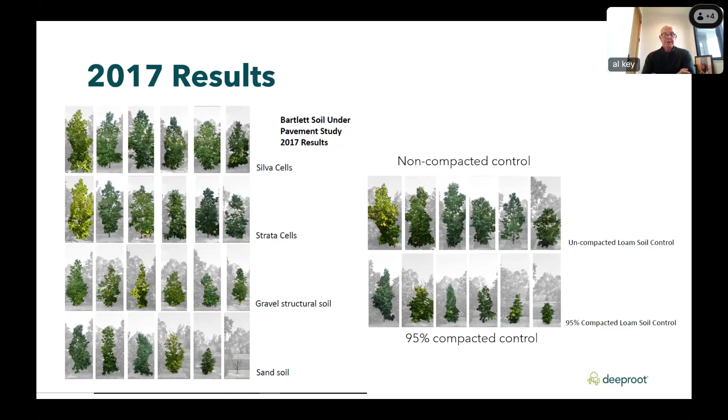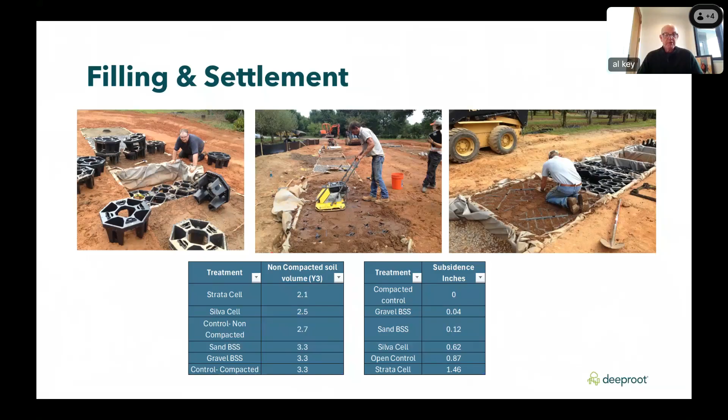Great, thank you Al. And thank you for adding Silva Cells and soil cells to our toolboxes. I think the stormwater management benefits alone are amazing, and never mind the opportunity to give trees the longevity they need to get all the benefits from them. So thank you. Of course.

We had a bunch of questions in the chat, and the one I want to make sure we cover is regarding the difference between using native soils and processed soils. Can you talk more about that?

Sure. I'm not too sure what you mean by native soils - you said native soils and topsoils, or the processed and unprocessed soils? Well, I would say that in processed soils, there are three different components: there's topsoil, which is the soil on top and we don't really know what it is, but it has organic matter and that kind of stuff; then there's sand that they put in for drainage; and then there's a compost component as well.